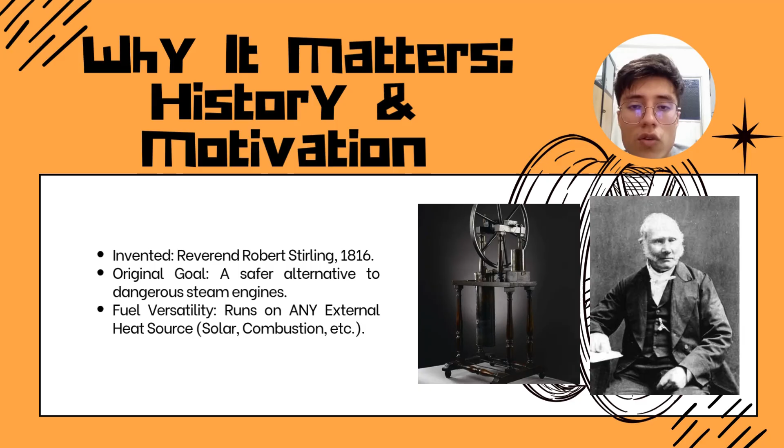The high theoretical efficiency of the Stirling, superior to standard steam, is its defining characteristic. This is due to its incorporation of a regenerator to recycle the heat that would otherwise be wasted between the hot and cold phases. This recycling allows it to approach the maximum efficiency limit of the Carnot cycle, making it one of the most theoretically efficient heat engines possible.

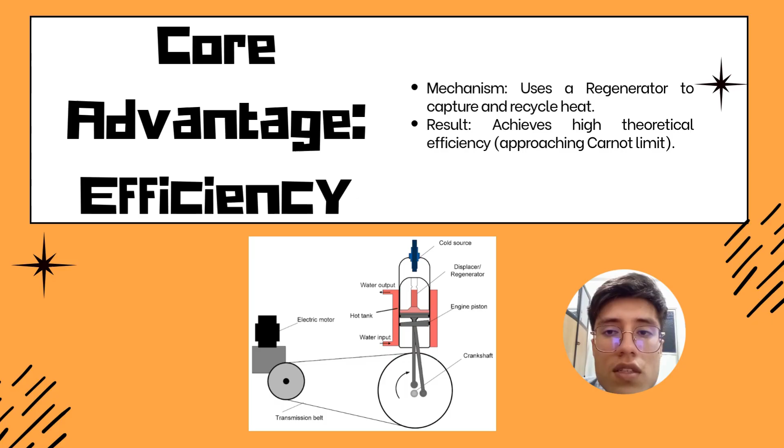The Stirling engine is an external combustion, regenerative, closed-cycle engine. It is operated by cyclic compression and expansion of air or another gas, the so-called working fluid, at different temperature levels such that a net conversion of heat energy to mechanical energy occurs. More specifically, it is a regenerative closed-cycle heat engine with a permanent gaseous fluid, where the closed cycle is defined as a thermodynamic system in which the fluid is permanently contained within the system.

Regenerative describes the use of a specific type of heat exchanger and thermal storage device known as the regenerator. This inclusion of a regenerator is what distinguishes Stirling engines from other closed-cycle engines.

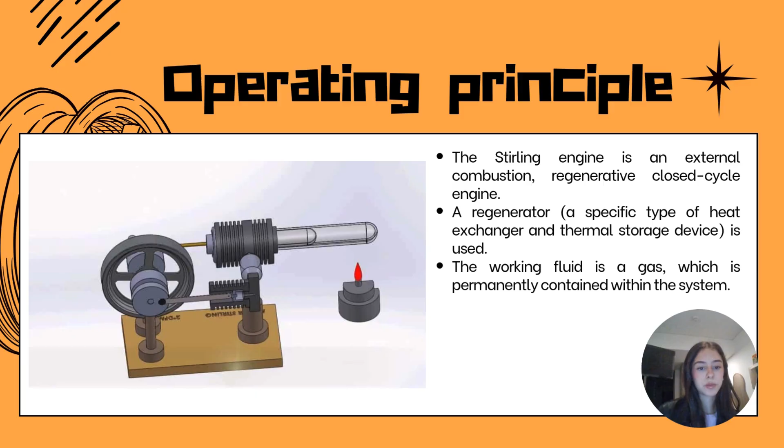This system consists of a cylinder with two pistons on either side and a regenerator in the middle. The regenerator can be a wire mesh, ceramic, or any type of porous block with a high thermal mass times specific heat, used for the temporary storage of thermal energy. The mass of the working fluid contained within the regenerator at any given time is considered negligible.

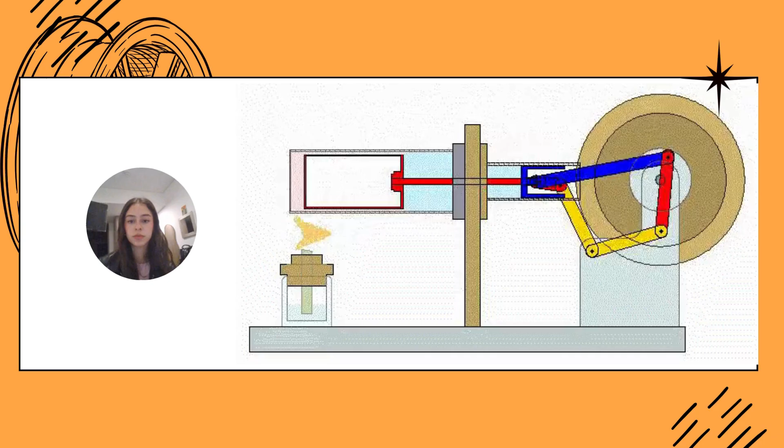The left chamber contains all the working fluid, a gas, at high temperature and pressure. During process 1-2, heat is added to the gas at high temperature from a source at high temperature. As the gas expands isothermally, the left piston moves outward, performs work, and the gas pressure decreases.

During process 2-3, both pistons move to the right at the same speed to maintain constant volume until all the gas is introduced into the right chamber. As the gas passes through the regenerator, heat is transferred to the regenerator and the gas temperature decreases from high to low. For this heat transfer process to be reversible, the temperature difference between the gas and the regenerator must not exceed a differential amount at any point. Thus, the temperature of the regenerator will be high at the left end and low at the right end when state 3 is reached.

During process 3-4, the right hand piston moves inward and compresses the gas. Heat is transferred from the gas to the sink at low temperature, so the gas temperature remains constant at low temperature while the pressure increases.

Finally, during process 4-1, both pistons move to the left at the same speed to maintain constant volume and push all the gas into the left chamber. The gas temperature rises from low to high as it passes through the regenerator and absorbs the thermal energy stored there during process 2-3. This completes the cycle.

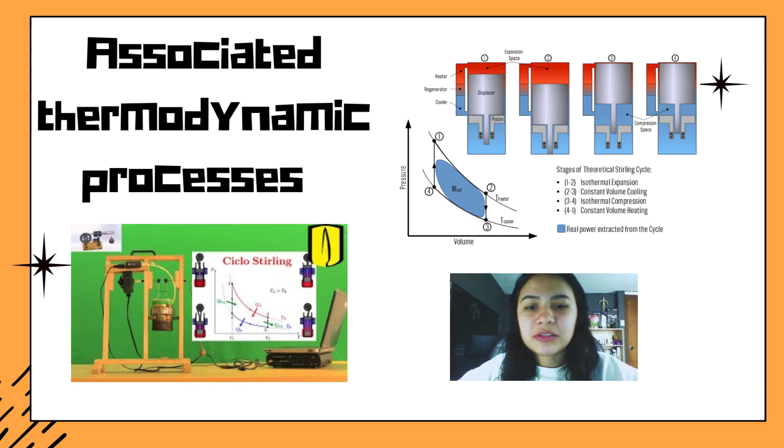Hi, my name is Vanessa. Today I will explain the four thermodynamic processes associated with the Stirling cycle. I will also describe the temperature-entropy diagram and the pressure-volume diagram.

Process 1: isothermal expansion. In the first process, the working gas expands isothermally at a high temperature. Heat is added to the gas from an external source.

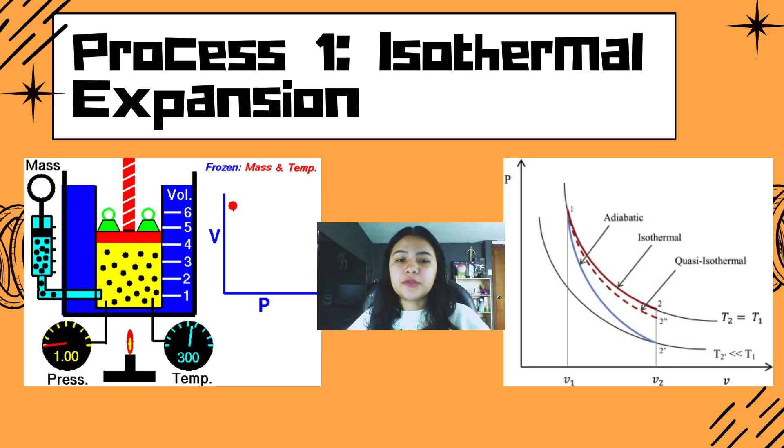Process 2: isochoric regenerative cooling. In this process, the gas is cooled at constant volume inside a regenerator, and then heat is transferred to the regenerator for temporary storage.

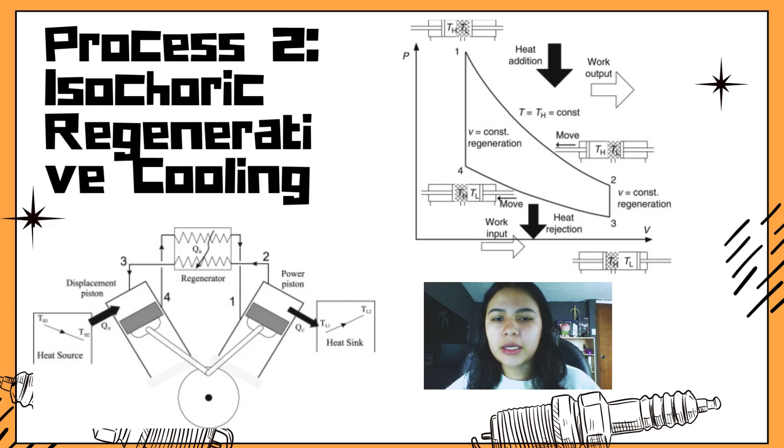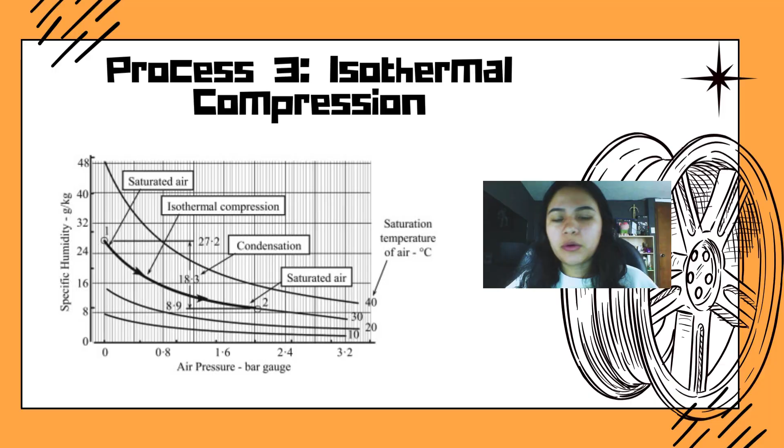Process 3: isothermal compression. In this process, the gas is compressed isothermally at a low temperature. Heat is rejected to the cold reservoir.

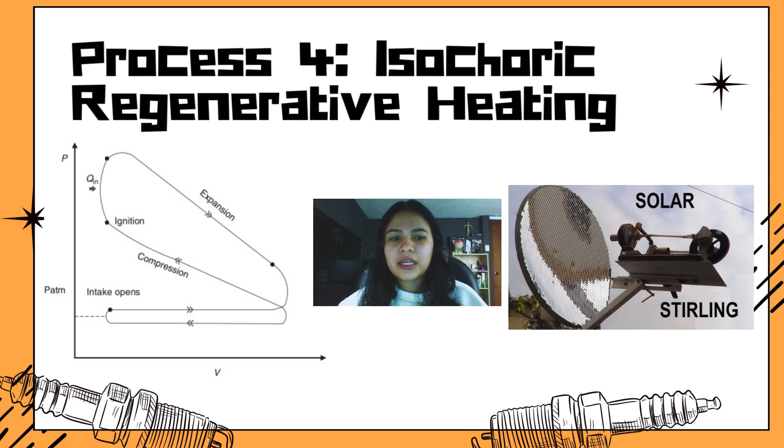Process 4 is isochoric regenerative heating. Finally, in this process, the gas is heated at constant volume using the energy stored in the regenerator.

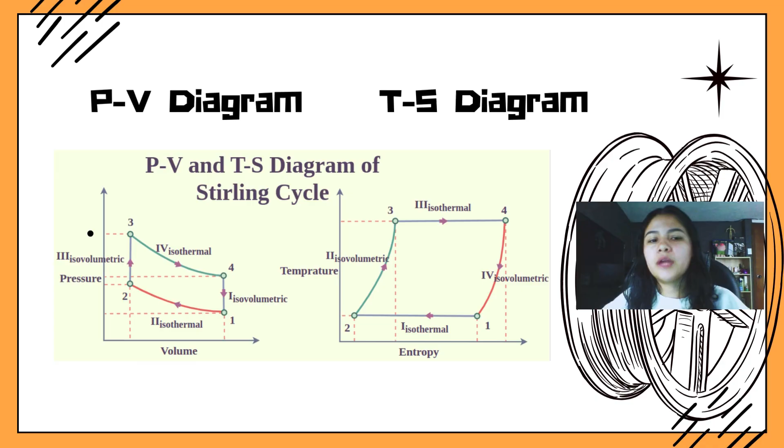So I am going to show an example of how a simple thermal machine works, through the exchange of energy with thermal reservoirs.

Initially, state 1, the air is at ambient temperature and pressure. When the flame is ignited, the air is heated at constant volume in the first cylinder until it reaches about a certain temperature, thus increasing its pressure. State 2.

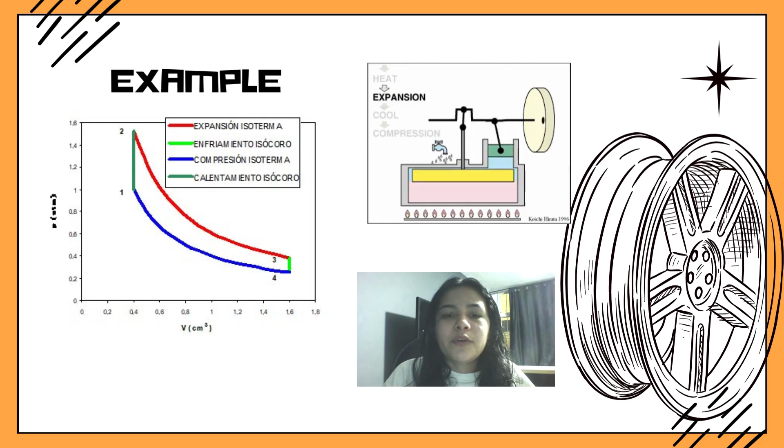From this point, the first piston moves at constant temperature, increasing the air volume and decreasing the pressure. State 3. The air then enters the second cylinder, which is at ambient temperature, reducing the air temperature at constant volume. State 4. The second piston moves back, compressing the air at this temperature and returning the air to the hot cylinder at state 1, from which the process repeats.

Okay, I'm going to explain the types of the Stirling engine.

The gamma type Stirling engine operates by cyclically heating and cooling the enclosed working gas, causing it to expand and contract to drive its mechanical components. In this design, the displacement piston moves the gas back and forth between the hot and cold regions, while the working piston produces the mechanical power of the engine.

Heat is applied at the top of the system through the heater, which warms the gas inside the upper chamber, known as the hot zone. As the gas in this hot zone expands, pressure increases and acts directly on the working piston, pushing it outward and delivering useful work to the crank mechanism.

When the crank rotates, it causes the displacement piston to move in a way that the gas is forced downwards into the cooling region.

Before entering this cold region, the gas flows through the regenerator, a component designed to temporarily store heat from the gas as it moves toward the cold zone, and return that heat when the gas moves back to the hot zone, improving the engine's thermal efficiency.

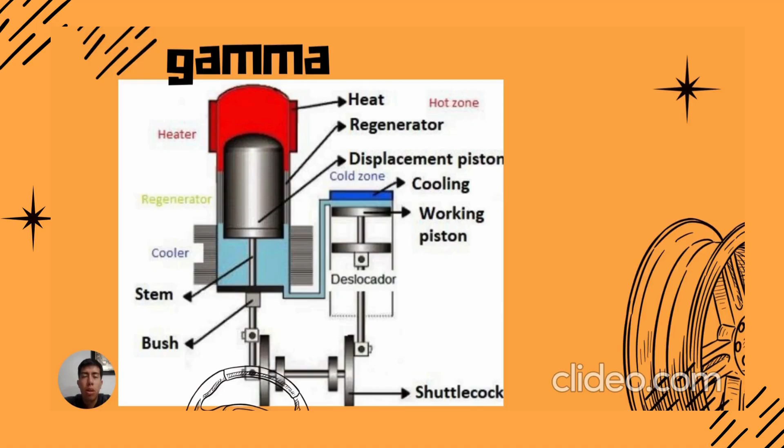As long as a temperature difference is maintained between the heater and the cooler, the gas will continue to expand and contract in a repeating cycle, driving the piston and producing continuous rotational motion. This makes the gamma type Stirling engine simple.

The beta type Stirling engine operates by cyclically heating and cooling an enclosed working gas, causing it to expand and contract in a way that drives the mechanical components of the machine.

At the top of the system, the heater supplies external heat to the gas located in the expansion space, increasing temperature and pressure. When the gas expands, it pushes down on the power piston, which is responsible for producing useful mechanical work.

As the power piston moves, it transfers this motion to the rod, which then drives the crank inside the crankcase, converting the piston's linear movement into continuous rotational motion.

Beneath the power piston is the displacer piston, which does not produce power but instead shifts the gas between the hot and cold sections of the engine.

When this displacer piston moves upward, it forces the gas to travel downward through the cooler and into the compression space, where the gas releases heat to the surroundings and pressure decreases.

When the pressure drops, the power piston is pulled upward more easily by the crank mechanism.

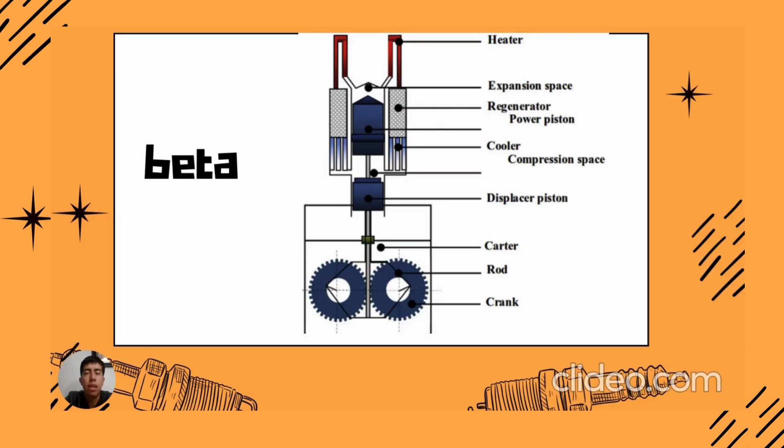As the crank continues to rotate, it maintains a fixed phase difference between the displacer pistons and the power pistons, ensuring that the gas is always moved to the correct region at the correct moment in the cycle. The engine repeats this sequence continuously: the heater warms the gas, the power piston extracts work from the expansion, the displacer shifts the gas into the cooler which contracts, and the crank mechanism coordinates the timing of both pistons. As long as a temperature difference is maintained between the heater and the cooler, the engine will continue producing smooth, reliable power.

The Alpha Stirling engine functions by cyclically heating and cooling a fixed amount of gas, such as air or helium, shuttling it between a hot and a cold cylinder to generate power.

In this type of engine, the process begins in the hot volume, where an external heat source heats the gas, causing it to expand. This expansion forces and drives the hot piston downward. The expanding hot gas is forced through the heater and into the regenerator. This component acts as a thermal sponge, absorbing heat from the gas as it passes through, which cools the gas on its way to the cold side.

The now cooler, contracted gas enters the cold volume, where the cooler further removes heat, lowering the gas pressure. This low pressure state allows the cold piston to move upward easily, compressing the gas and pushing it back through the system. On this return journey, the gas passes back through the regenerator, where it reabsorbs the stored heat, becoming pre-warmed before it re-enters the hot volume to begin the cycle again.

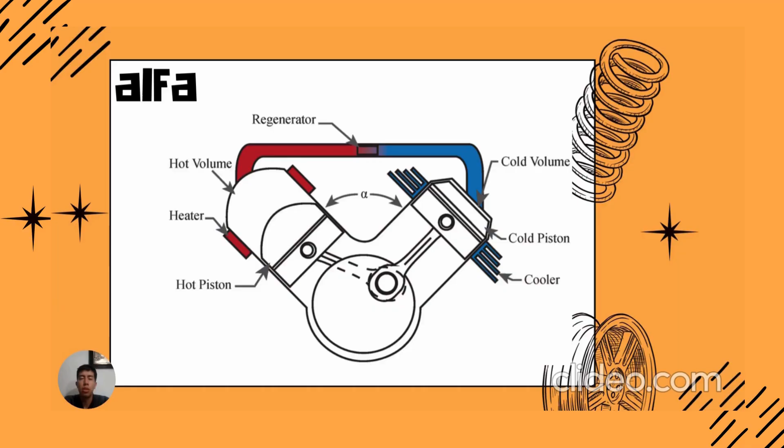The phasing motion of the two pistons, often connected to the crankshaft at a 90 degree angle, ensures the cycle repeats continuously, converting thermal energy into useful mechanical work.

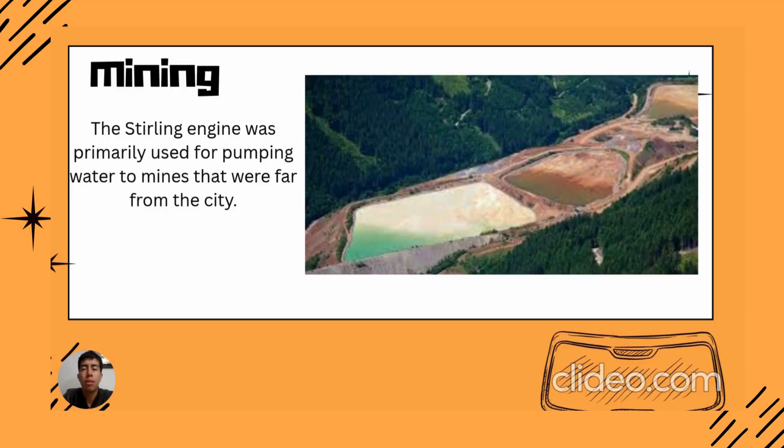Unfortunately, this simplicity affected the engine's performance, as it could not generate the same flow rate as the steam engines of the time. However, today things have changed, and it's possible to achieve very good performance and great safety compared to the steam engine.

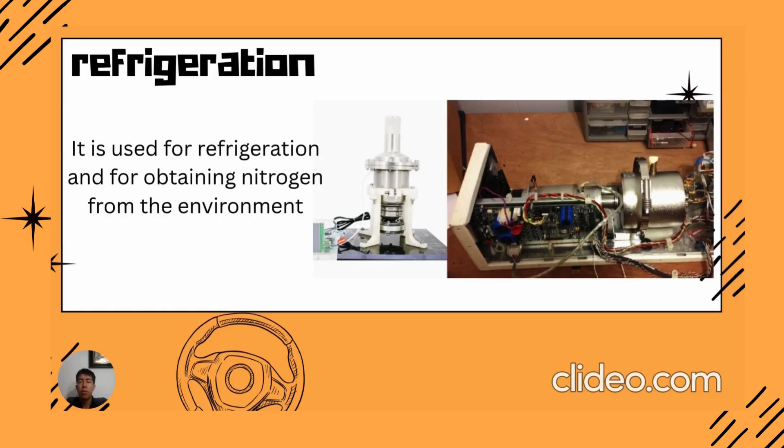Refrigeration: the use of Stirling engines in refrigeration is one of the most common applications today. This is based on reversing the operation of the Stirling engine used in previous applications. Now, instead of applying heat to the engine's hot source, mechanical energy is applied to the piston so that the engine absorbs heat. This is most efficient when dealing with extremely low temperatures, such as cryogenics, reaching temperatures as low as 22 Kelvin, which are currently used for cryogenic applications today.

The Stirling engine stands as a thermodynamic masterpiece, defined by its independence from the heat source and its exceptional efficiency, operating through external combustion. It offers unparalleled fuel versatility. Scientifically, its ideal cycle is a model of rigor, structured by two isothermal processes that maximize work and two isochoric processes where the crucial regeneration functions, recycling heat to ensure the system asymptotically approaches Carnot cycle efficiency.

This regenerative design is not merely a feature, but the principle that elevates the Stirling from a simple thermal engine to a machine that utilizes intelligent heat management as its highest expression of efficiency.